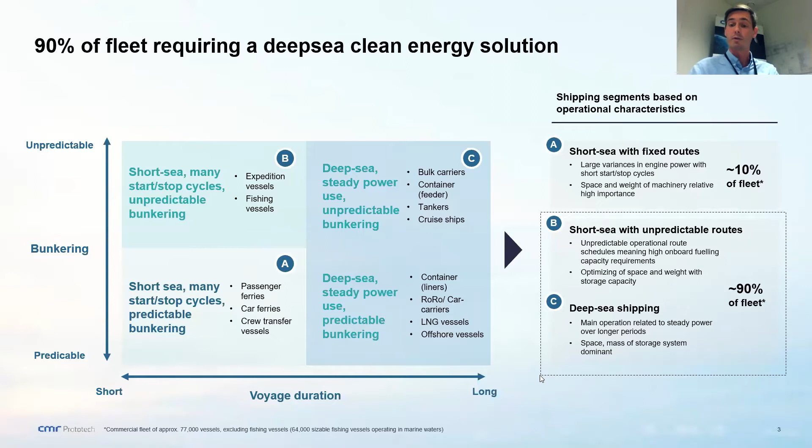Obviously, we have different types of technologies that are relevant. Batteries have a very important role, especially within energy optimization, peak shaving, load balancing for different types of vessels. We have the low temperature fuel cell systems, the PEM technology, that are obviously highly attractive when it comes to fast transients. It's compact, it's low weight, and you have declining costs due to other applications that we are starting to see. However, as we assess it, this technology is most relevant for pure hydrogen operation.

So when we are looking into the different types of fuel, especially ammonia, but also methanol, LNG, LOHC, other types of relevant fuels for the future, I think the most relevant technologies are the multi-fuel internal combustion engine technology and the high temperature fuel cell systems that we are looking at. Both have their advantages. The engine types are developing to also be able to operate on ammonia. You have the experience, the heritage, the low capex, possibility to retrofit engines, while they also need development to take into account possible fuel slips, NOx production, and also fuel mixing due to the low flammability of ammonia.

The high temperature fuel cells have their clear benefits on the fuel flexibility. You can operate on all these relevant different fuels with minor modifications on the systems. It has the potential of having a superior efficiency, reducing the fuel consumption, which is very important, and even more important when we go into the more sustainable fuels that have a lower energy density than existing fuels.

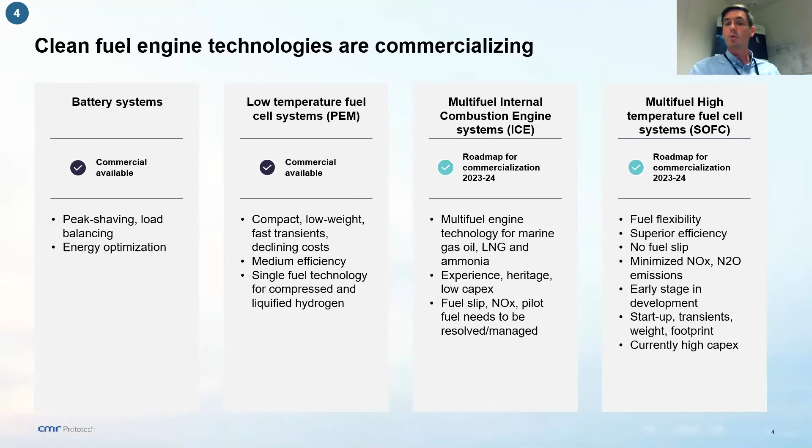You have no fuel slips, and we are looking into the NOx, N2O emissions to minimize this and get it close to zero. While on the other hand, it is technology that is quite early stage in development. You have slower transients and startup times, and a very high potential for capex reductions in years to come. So this also underlines the importance of the ShipFC project.

Prototech comes from a research institute for many years, focusing on technology development on different segments. In June, we were acquired by one of the largest industry companies in Norway, Aker. And we are now focusing a lot of our efforts on commercializing these high temperature fuel cells for marine applications. We have two large official projects: the ShipFC demonstration, and ongoing work together with Odfjell for a deep sea vessel retrofit pilot, working together with many large and interesting companies.

We also have development projects ongoing where we are developing the systems and testing the systems and preparing for these installations. Now, the ShipFC project has 14 partners, end users, research institutes, and other partners involved. A very interesting project. We will, as Tor also mentioned, demonstrate a 2 megawatt ammonia fuel cell system on board Eidesvik's Viking Energy offshore supply vessel.

We received 10 million euro funding from the Fuel Cell and Hydrogen Joint Undertaking, with a total budget of 21.5 million euro. And with a target of at least 1 year trial period and 3,000 hour operation, but with an ambition to have it on board as long as practically possible.

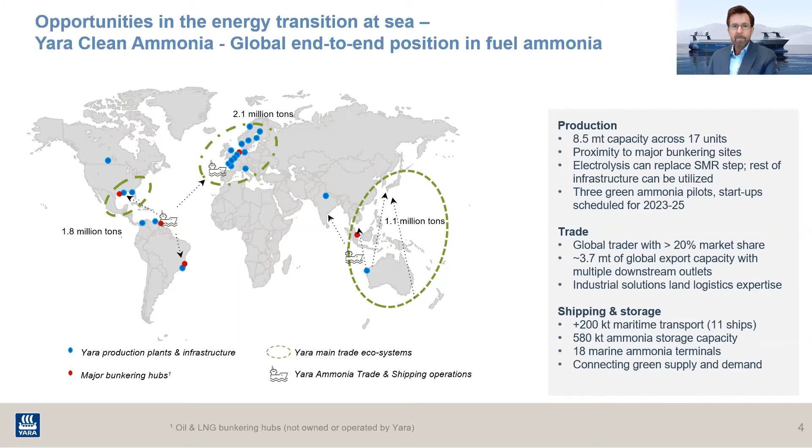So how are we planning to take this forward then? There have been many discussions around what the best approach would be, because which transport corridor will emerge as the first one is the big question here. Looking into the crystal ball, there are no evident answers, but it might be that there are some heavily trafficked international corridors that might arrive soon. And by soon, we're talking about 5 to 10 years.

But we also see that the activities in Norway are quite high. There are a number of projects going on, and we have a presence here which is unique. We are running our largest production project in Norway with the Hegra project, which is making Norway a priority area for us. So that's where we plan to start, and it's also planned to be the testing ground for technical solutions, because what we are looking at is ammonia bunkering solutions as onshore terminal and shore-to-ship bunkering. We're looking at barges and ship-to-ship bunkering, and we're looking into floating terminal operations. All of those options are still open, and it's early days in the development of technical solutions here.

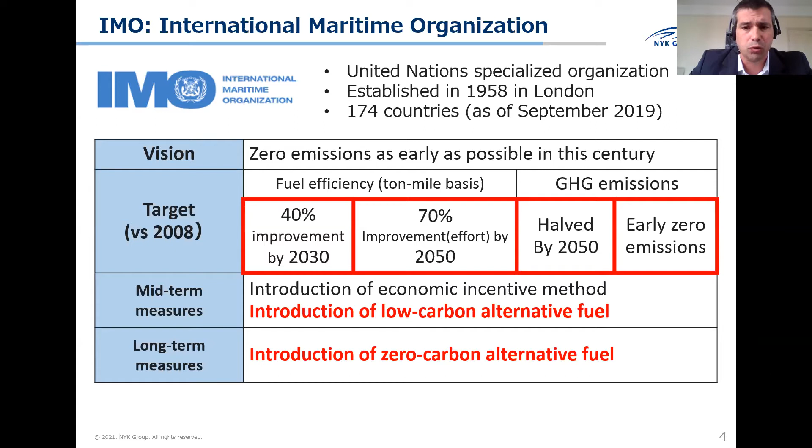However, the targets require the adoption of new alternative fuels, the progressive transition towards low carbon fuels, starting with LNG, as it's the case through this decade. But more ambitious targets will require essentially to shift to zero carbon fuel.

In this sense, for the next decade, what we expect as ship owning company is the coexistence of several alternative marine fuels together with different technologies that may have different uses in function of the output requirements in terms of engine power, especially. Batteries may be the best solution for small boats with limited navigation range. For bigger ships engaged in coastal navigation, the fuel cell may be the preferred option in the future, either hydrogen or ammonia. When it comes to deep sea vessels, we see that possibly the first opportunity will be given by internal combustion engines running on ammonia.

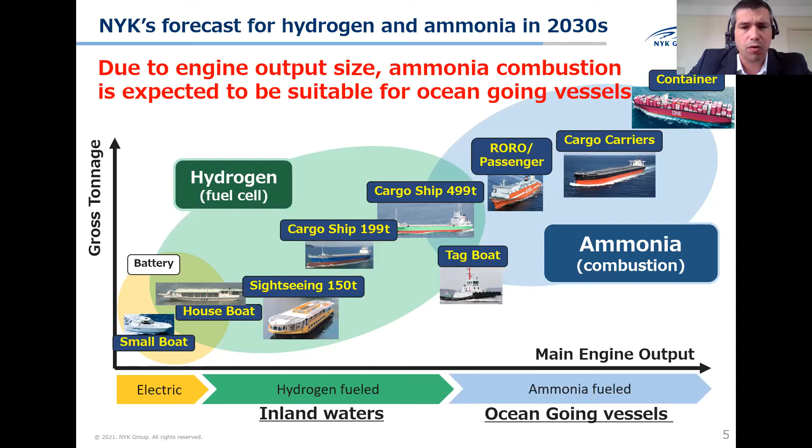So what is NYK doing in this respect? Which are the initiatives that NYK is taking? We are working together with different partners, including shipyards, classification societies, engine manufacturers, participating in the research and development of several projects involving the use of ammonia as marine fuel. We have the ammonia-fueled tugboat, ammonia-fueled ammonia gas carrier.

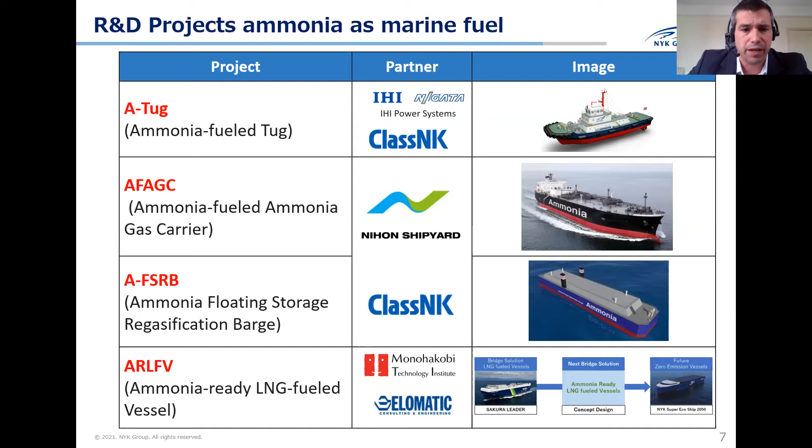We have two interesting concepts: ammonia floating storage regasification barge, which could be a suitable option for areas where ammonia is required as a product, but there is a limitation in terms of onshore storage. And we have recently announced the development of ammonia-ready LNG-fueled vessels.

A little bit of detail in these initiatives, starting with the ammonia-fueled tugboat. NYK is working together with IHI Power Systems and Class NK on this project, which could be the first ammonia-fueled tugboat into practical use. These three partners have previous experience with the adoption of LNG for the same application, for an LNG-fueled tugboat built back in 2015. So most of the knowledge and experiences can be replicated for the ammonia case.

The project obviously involves the research and development on all the necessary technical elements for the safe use of ammonia as a fuel, from the bunker manifold, the fuel tank, the fuel supply system, the type and characteristics of the internal combustion engine in this case, all the safety systems, leak and gas detectors, double-walled piping where necessary, etc. And it also involves the development of operational procedures to use ammonia, safety navigation methods, and the guidelines for the safe and reliable bunker handling.

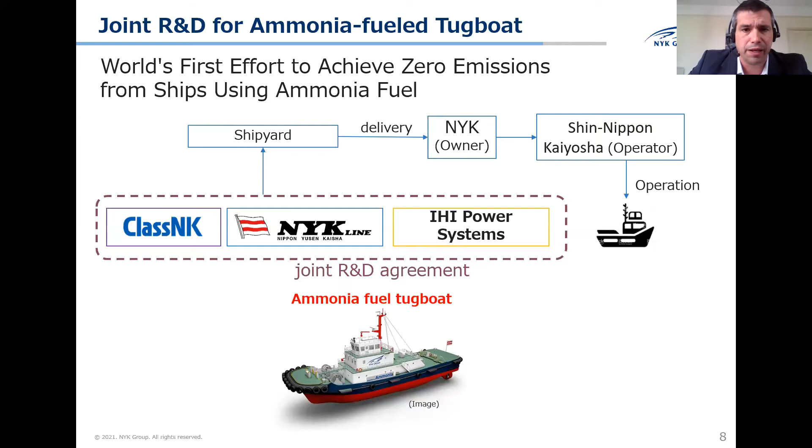This project, the ammonia fueled gas carrier, is a joint project with Nihon Shipyard, Class NK, and recently with Yara. And in this project, basically the ammonia carrier shall use the ammonia stored in the cargo tanks as marine fuel. This is a very usual concept for other type of vessels carrying combustible products as a cargo.

With this project, what we aim is on the one hand to contribute to the increasing large-scale transportation and supply of ammonia, and at the same time it will serve as a test bed and benchmark for the use of ammonia as marine fuel. The obvious advantage of this project, this application, is that we do not require to develop the bunkering logistic chain.

Finally, we have recently announced the development of a concept, the ammonia-ready LNG fueled vessel. This should facilitate the transition from the first step that we have taken, which is converting some of our vessels in our fleet into LNG as initial choice, and transition to the second step, which would be the adoption of zero carbon marine fuel, such as ammonia. For this project, we expect the first results by early 2022.

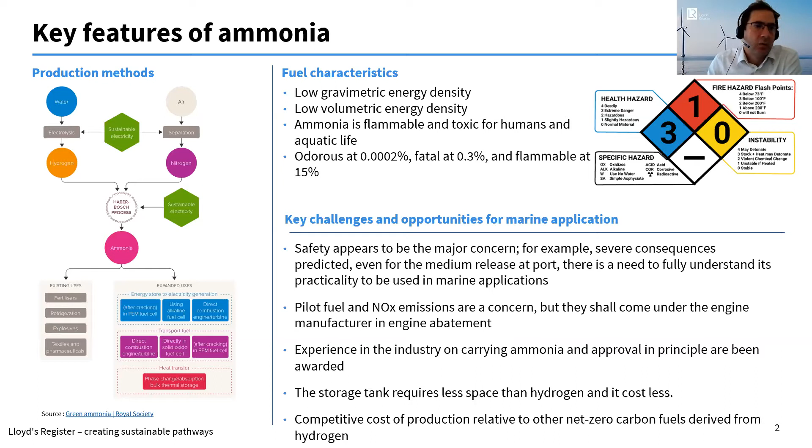At the moment, ammonia is used quite heavily within the fertilizer industry, and is used as a refrigerant as well, both in chemical and food processing plants. And that's really it. Most of it's covered here. But when we're looking at ammonia as a fuel, safety is the major concern, which we're addressing on several projects, some of which I'll touch on.

Coming back to looking across other industries, currently ammonia isn't used as a fuel in the maritime industry. There's pilot projects starting, but it's important that we try and learn as much as we can from other industries. So some of the work we've been doing is looking at the cases of work in other industries.

Now, ammonia is 180 million tons traded per year. 80% of that is for the chemical and fertilizer industry. So that would be a sort of initial point to go and look at. But we also need to look at the applicability and the viability of that industry compared to the maritime industry.

And when we look at that industry and we look at who's operating it, it's very much the process plant is not their key concern. They're looking at the food. They're loading and discharging food into warehouses. They are producing food. So the capabilities and competencies within that sector is probably more relevant to the way we

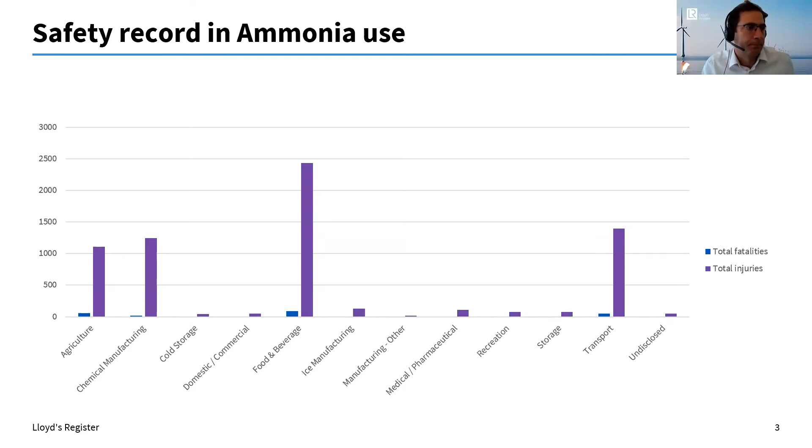So looking at the rules and the rule requirements, at the moment, if we look at the way gas is put in as a rule, we have high-level goals. So we're looking at safety, and this is shown as equivalent to traditional fuel. The risk is limited to a minimum by design, and then the risk is also mitigated as much as necessary, so as low as reasonably possible.

And what we really need to do is the identification of the gas as fuel regulations: we need to see which ones remain applicable, which require change or are missing, and then benchmark designs. We need a framework and questions to test designs against inherently safe design principles, and we need guidance on what constitutes the appropriate level of inherently safe design, because it can be a very long process going down that way.

But ideally, at the end, we reduce the severity and the scale of the consequences, we reduce the likelihood of accidents, and we need to protect from toxic exposures and fire and explosion. And this isn't just for ammonia we're talking about here, but also following the same approach for hydrogen as a fuel.

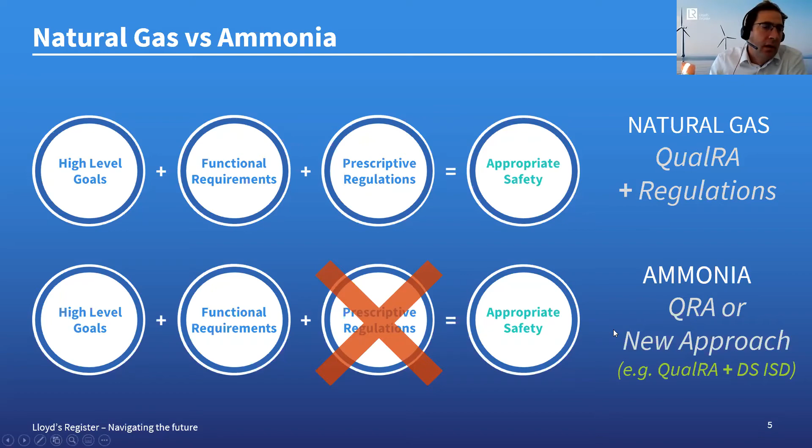Arguably, its characteristics mean that no member state would propose work unless they were able to propose requirements which addressed any reservations over the explosive potential and toxicity of the fuel. And that means after extensive trials. But extensive trials would probably need interim guidelines, which is where we are now. So the resolution of this catch-22 will depend on the risk appetite of member states, given the intent to transition shipping away from the reliance on fossil fuels.

Now, there's three different ways. The most conservative approach: interim guidelines, and allow ammonia as fuel on ships following the interim guidelines. But the most likely approach is to take interim guidelines associated with the IGC code and the IGF code and allow the use of ammonia as a fuel. And following experience building based on the interim guidelines, incorporate updated provisions into both the IGC and

IGF codes. And the least likely approach is to update the IGC and the IGF codes in parallel with first developing interim guidelines. But the main blocker for ammonia may not be on ships, but localized concern over storage of explosive toxic fuels in ports near built-up areas, and this could well inhibit its availability worldwide.

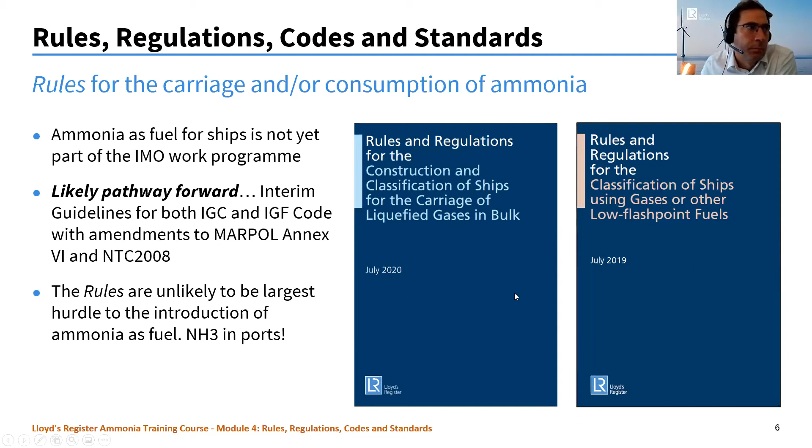So taking that into account, we need to look across the whole supply chain, and it is good, I mean, with the presentation from NYK to see the ammonia bunkering barge there as well, in terms of addressing some of the supplies. But when we look across the supply chain, we need to take into account other parts: the harbour authority, the harbour operating company, the dock operator, the berth or terminal operator, a road tank operator, bunker supplier. The list is relatively endless there.

When we look at the UK, for example, you have the Control of Major Accident Hazards regulations, so COMAH regulations. They have lower and upper tiers, and therefore it depends what site you are. If we look at ammonia, the lower level for ammonia is 50 tons. And when you're carrying above 200 tons, you are then in an upper tier level. And that just brings additional requirements for safety, which may be too prescriptive in some ports, particularly in built-up areas and ports in cities.

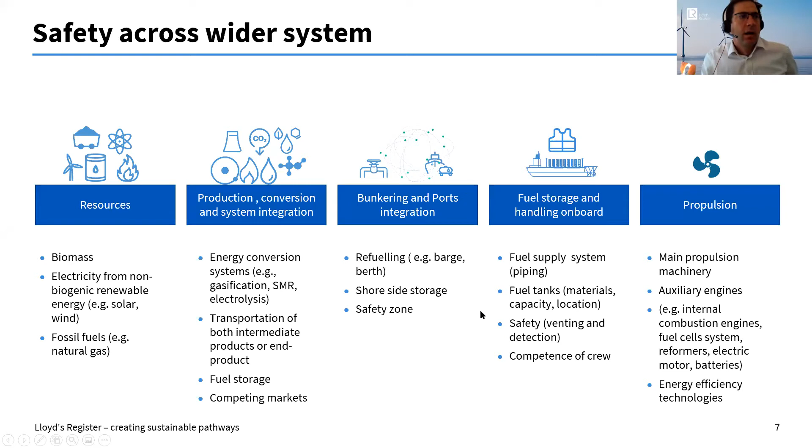Just as an overview of other projects we're working on, I'd say a flagship project is the Castor initiative. This is about collaboration, working with MISC, Yara, the Flag Administration, a shipyard and an engine supplier. Originally, it was just a traditional shipyard project, but fuel supply was brought in. And that's really to address the supply chain challenges. And we have a number of other projects underway globally as well. And this is just a highlight.

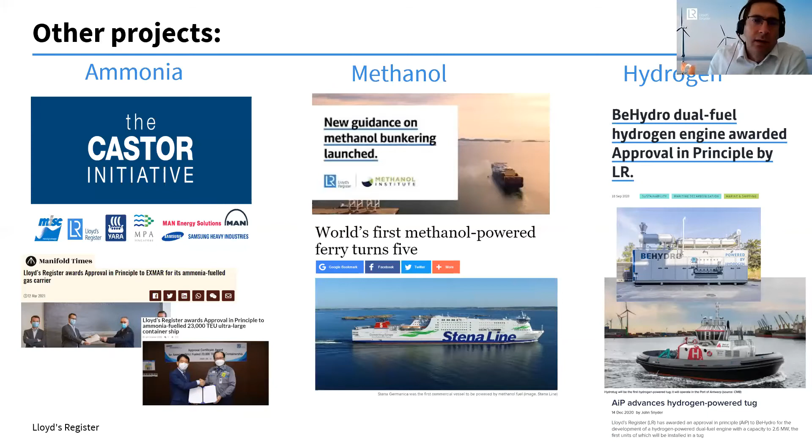But really what we've been doing from the Maritime Decarbonisation Hub is we've been analysing all the projects across the whole supply chain, from resources through to the propulsion of the ship. And we've examined this against technology, investment and community readiness and mapped them out. And this is available.

Charles, we need to ask you to kindly just conclude. Yep, okay. I'm finishing, sorry. Just finishing up.

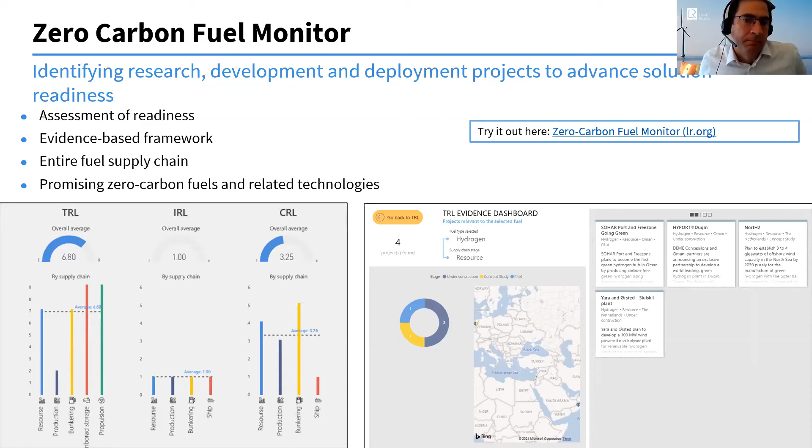So all of these projects, and they're not just the LR projects, are based on a dashboard as well. So they're available to see there. And this is about collaboration and sharing. So on that, thank you very much, and apologies for going over time.

Thank you very much, Charles. It's a tight schedule, so thank you for that. Very interesting presentation, and good to see the holistic perspective for both what's going on onshore and also offshore. So that falls in well in line with both the ShipFC project and also the theme for today. So thanks again very much for your presentation.